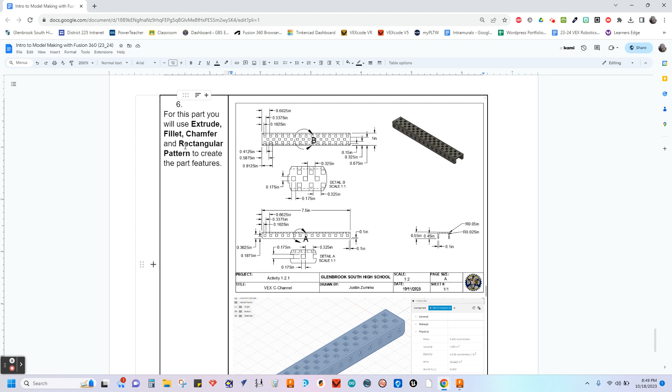To create this, we're going to use a series of features with extrude, fillet, chamfer, and rectangular pattern at the heart of it. So to get started, you can see on this multi-view here, there are a lot of different numbers, all corresponding to the spacing for the different holes. I tried to follow the rules for dimensioning and baseline set, but I also gave you some detail views to actually hone in on just the spacing and the size of each one of these holes.

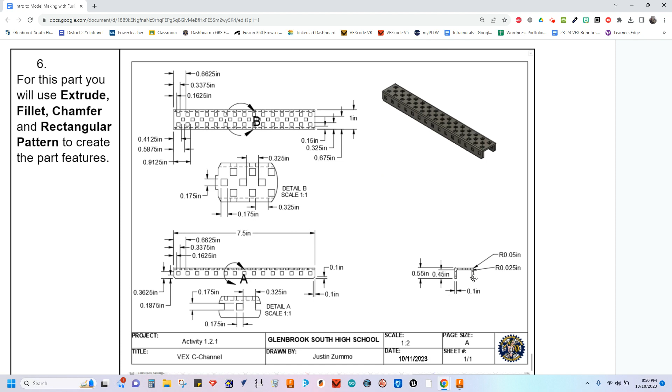I actually gathered all of this information by hand using a dial caliper and recreated the part from scratch in that way. We're actually going to get started by creating a sketch profile with these numbers in mind, and then extrude that profile all the way across, and then with a series of steps between creating a sketch, extruding it across, and then using a rectangular pattern to repeat it all the way down the row of the C channel.

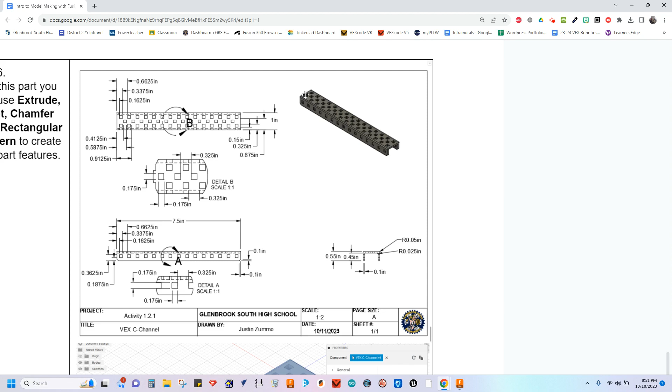Same thing on top. You see there are two different rows of holes there. We'll be able to create a sketch for these two squares and rectangular pattern those all the way down across. And then for the middle row, we'll do a third sketch, extrude that through, and then again, rectangular pattern it down the row to fill it in. So that's just a quick look at how we're going to create this part. The numbers we're hoping to hit for volume are 1.190, and for area, we're looking at 30.48.

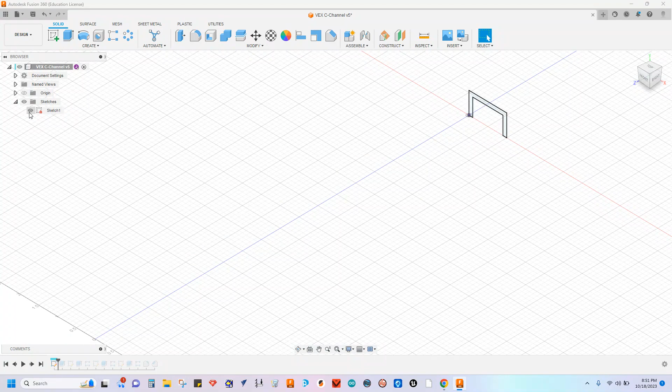So here we are in Fusion. This is what that completed part is going to look like. And if I jog us all the way back to the beginning, this was step number 1. Let me go ahead and turn my sketch back on so you can check the visibility on that. This was the original sketch. This is where we get started.

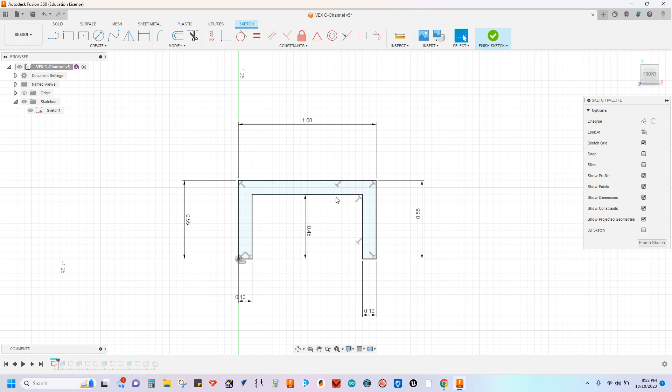So starting here on the origin point, I went up 0.55, across 1 inch, came back down that same height, 0.55, created the thickness here at 0.1. On the interior, went up 0.45, and you can jump to the other side here, do the same thing, 0.1, and then up 0.45, and then just connect the dots here, but that is going to be 0.8 across the middle. Once you've completed that sketch, the next step was to extrude that.

For the length on the extrusion, we want to set that to 7.5 inches and bring that all the way across. Once the extrusion has been made, we can go ahead and start to detail in all the different holes that we're going to need. So this next sketch was right on the side of the part.

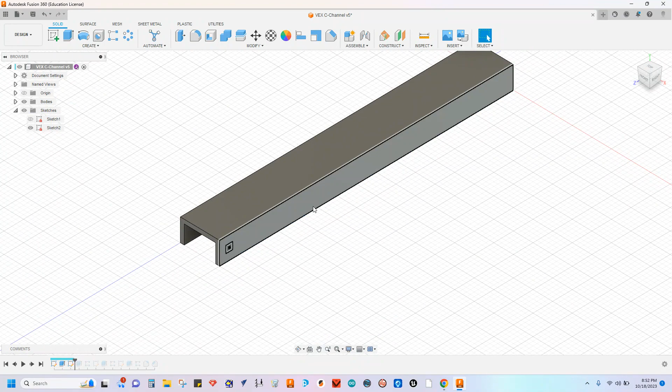The important dimensions for that sketch: you're going to create a square for the cutout, and that square is going to have equal distances on each side, 0.175 on each side. And for your placement, you want to create that square at 0.1625 off the left edge here. So draw it in and then set a dimension to get it into position. And then from the bottom to the bottom here, you can set a dimension at 0.1875.

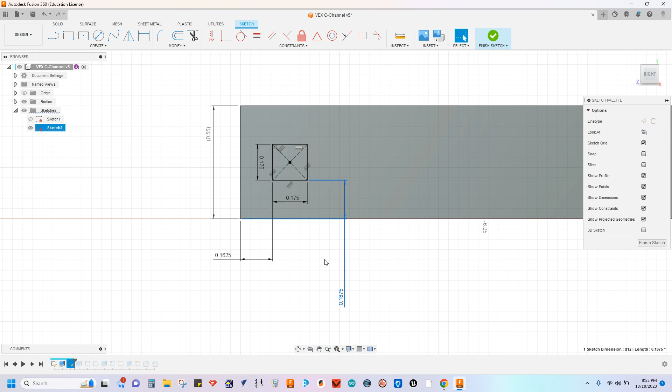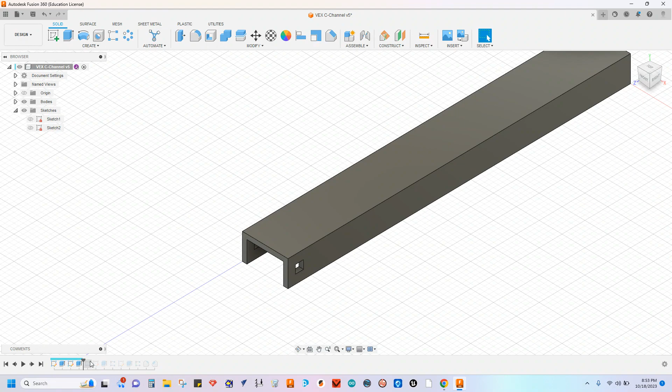With that square in position, you'll then do an extrusion and cut that all the way through the part. So that is our next step. To show you the extrusion there, I just dragged it all the way through. Didn't really set a particular value to that. Just wanted to make sure it went through the other half of the C channel. So cut that through, and then we have our first rectangular pattern. How does that work? With rectangular pattern, you have some options here.

You want to go ahead and select object type as a feature. Objects, select the extrusion that we've created. For axis, I just selected this top line that you can see highlighted in blue right now. And then for distribution, you want to put that to spacing. It's either extent or spacing. We're using spacing on this one.

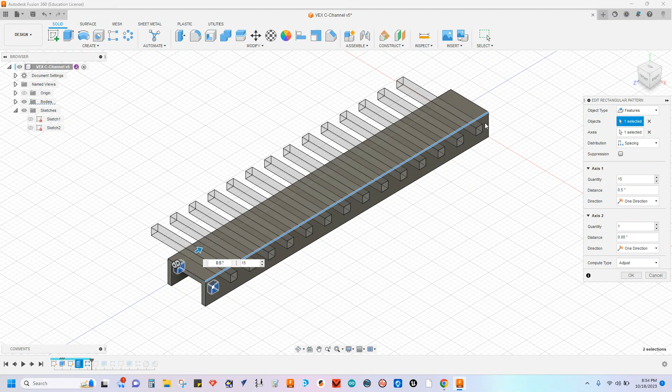Quantity is 15. The distance is 0.5. That's again referencing your spacing. So 0.5 for spacing. And that was it. You want to get 15 of those going all the way across and say OK. And now on each side, you should have those same cuts all the way down the row of the C channel.

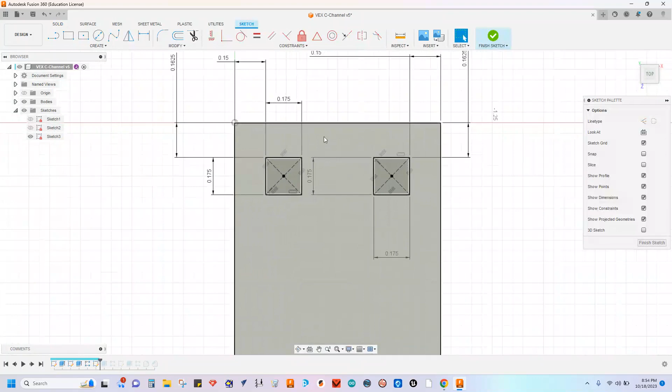The next step will be to create another sketch. Turn the visibility on for that. I went to the top. The dimensions on this sketch will look like this. The holes themselves will be the same. The square holes are again 0.175 and 0.175. And for the positioning from the edge of the part, you want to set that to 0.15, 0.15.

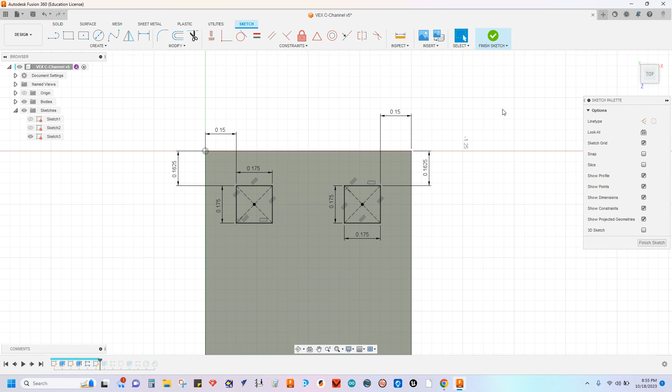And then from the top down to the top of where the square opening is going to be, you're going to set that to 0.1625 on each side. So those are the values you're looking to get dimensioned out. Once you have everything in place, finish sketch. And again, repeat the process from the last time. We'll extrude that all the way through. No particular value. I just drag the arrow down through the part.

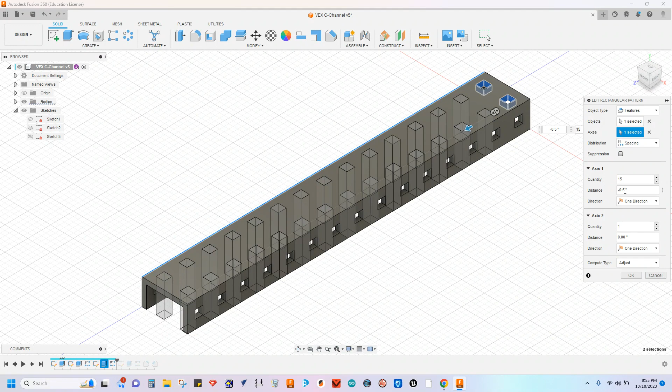And then rectangular pattern again. Same thing, features. Select your object as the extrusion. Set the axis. I just selected this backside that's now currently highlighted in blue. Distribution is spacing again. Same numbers as the last time, 15 for quantity, 0.5 for the distance.

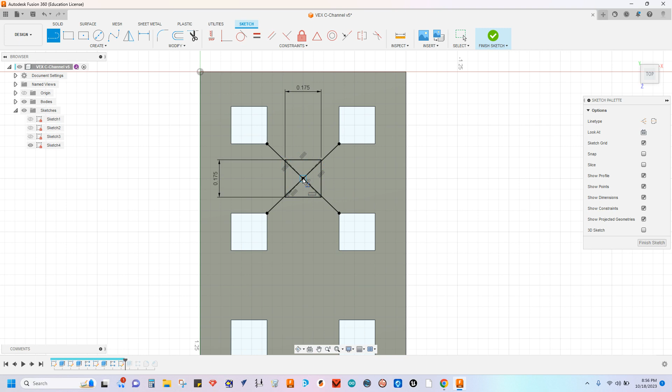Now on the last one, the last cutout, this is what the sketch looks like for me. Now I was able to take a line and do a little crisscross action from this corner to here and from this corner to here. And that gave me a really quick way to find the center of where this square opening needs to go. So find the center, then draw in your center rectangle at the dimensions of 0.175 and 0.175.

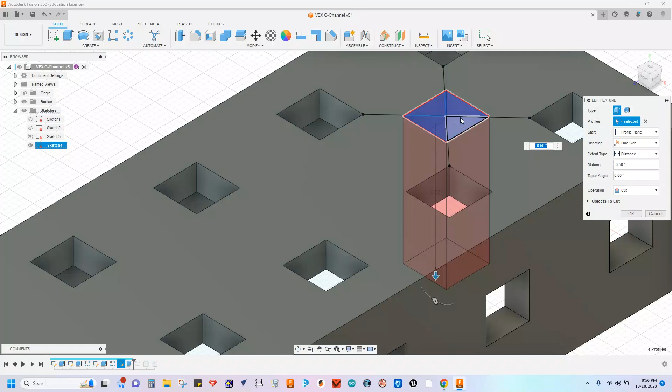With that then in position, I went and extruded that through. So extrude that through. I had the crisscross on there still, so I selected all 4 parts. That's why it says 4 profiles selected, and just drag that through the part again so it made the cut.

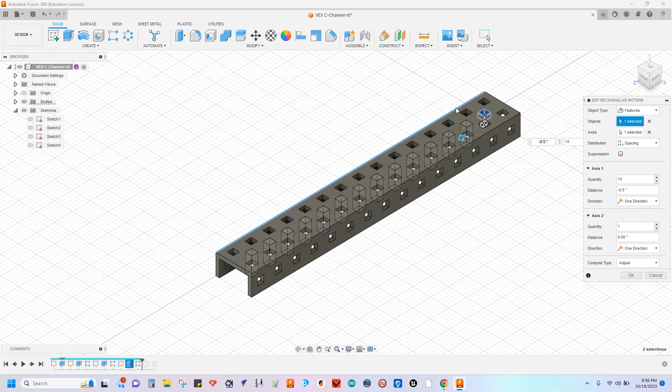And then we're going to go and do our last rectangular pattern. The values on this are basically the same. We're just going to do quantity 14 this time instead of 15. Everything else was the same as before. Same axis as the last one as I showed you. Create all the cuts all the way down the part.

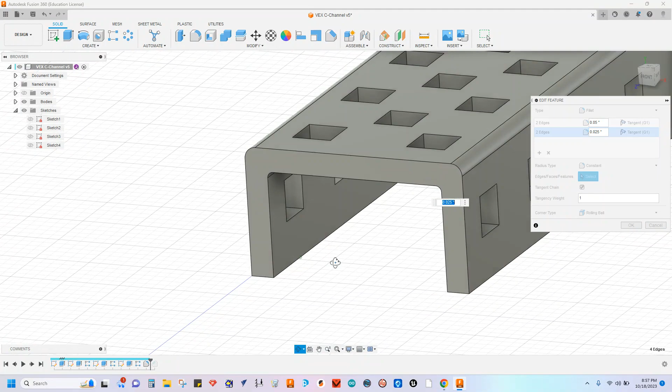And then 2 more features to go. We're going to add fillets. The fillets I did all at once. There are 2 edges that are at 0.05, and those are your outer edges here. So the outer edge on each side is at 0.05, and then your inside edge is going to be at 0.025. So if you want to rotate this way, you're going to fillet this inside edge on both sides of the part at 0.025.

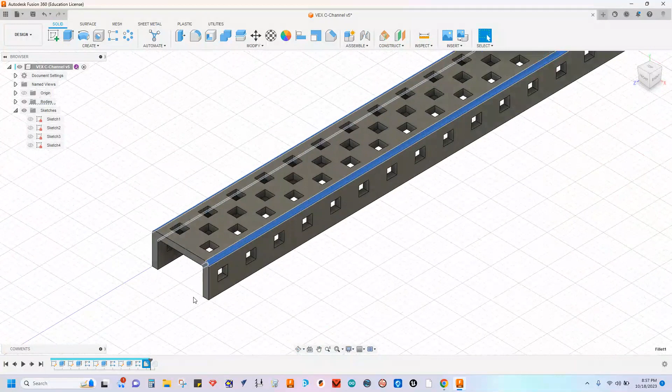You can see those all highlighted in blue right now if I have them selected like this. So the inside and the outside edges will all get a fillet. And then the last feature is to chamfer off the ends. We're going to chamfer these ends off. Add that in. There they are.

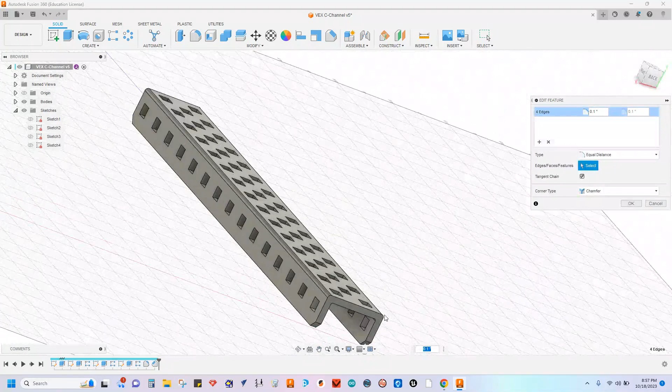For the chamfer, you're going to set that to type equal distance, 0.1 for each of them. And you're going to get these 2 edges and then the same 2 edges on the other side of the part. Go ahead and chamfer those away. And that is how you create your very own VEX C channel.

The numbers we're looking to match. Check our properties. For the volume, 1.190, and for the area, 30.480. If you have those numbers correct, you can go ahead and save this as your last part, Intro to Model Making, Part 6, VEX C channel.